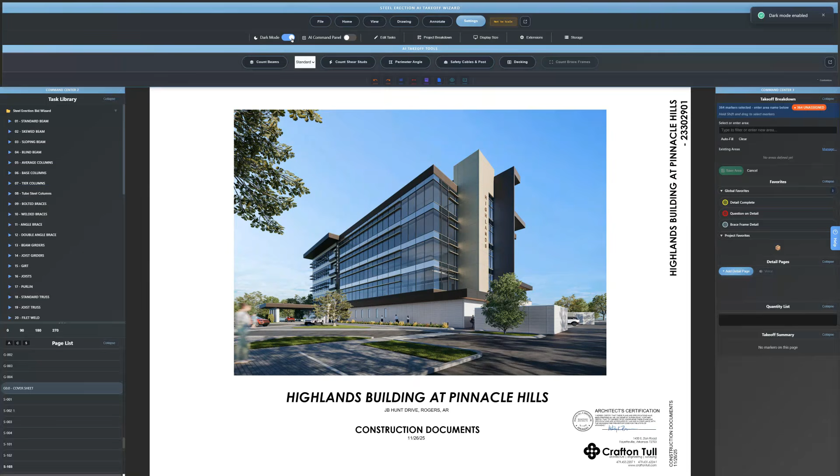So we're sitting here looking at it right now, the Steel Erection AI Takeoff Wizard. It's going to look like your typical takeoff software. A couple cool things in here: we have the ability to have light mode or dark mode. Myself, I'm more partial to the light mode, but that does give you an option on the modes.

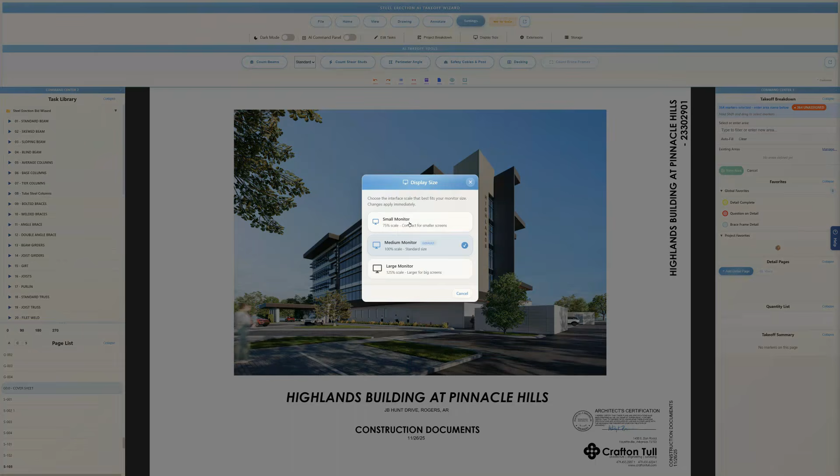I come over to display size. We have the ability, if we're on a smaller monitor, to scale it down to 75%. Everything changes. Make it large, real big if you have a hard time seeing like me. And then we come down to medium, and that's pretty much where I run it at.

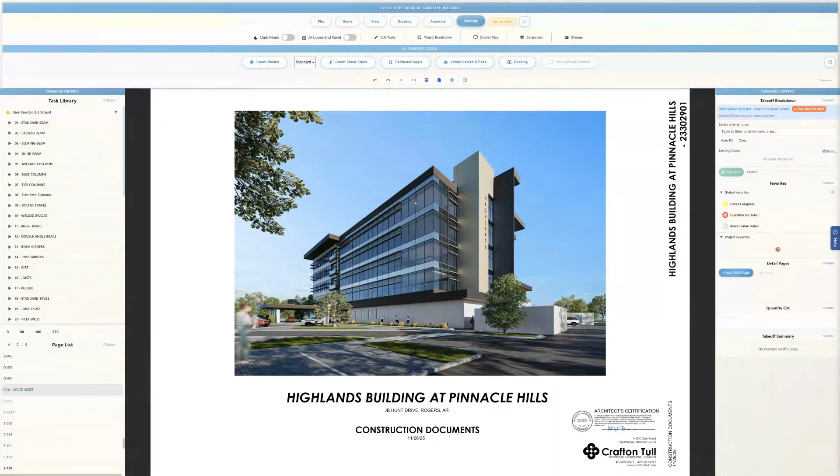Now to start this off, we're going to open up document control. Document control is where we're going to bring in our plans. Basically we've got to import the folder where the plans are at. Let me do that real quick. To start with, we're just going to select the plan folder itself. When we do that, it's going to pull the plans in, and once the plans come in, they're there.

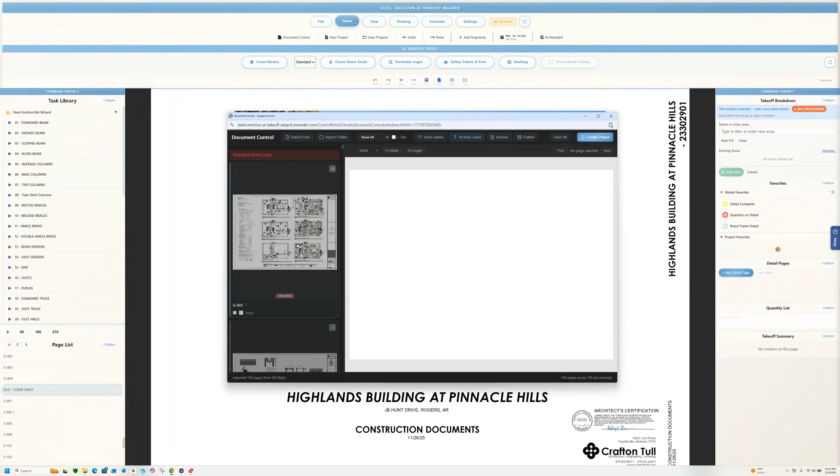At this point, the next thing we're going to do is flatten the drawings. As you know, a lot of PDFs have multiple markups on them, so when they come in they could have 15 layers on the drawing. That will slow down the processing of the PDF - when you change a page, it makes it change slow. So we flatten the drawings.

In the past, I've always used Takeoff - sold that to many of my clients, great software, amazing software in fact. But the challenge with that is I would have to use Bluebeam to label drawings because plans would come in not labeled, not flattened. So I'd have to use Bluebeam, which is a great software as well, to go in and flatten and label all my drawings. And then I'd also have to slot in addendums, and you guys all know that process and what a pain it is.

So what I've built here with document control inside of the Steel Erection AI Takeoff Wizard is the ability to bring in our plans, flatten them, and then have the system auto-label them for me. Once I do that, I'm going to bring in addendum 1 - it's going to replace all the drawings. Addendum 2, addendum 3, so on and so forth, until we have all the addendums replaced in the bid set. Then the system is going to create the bid set, and I'll hit a button and it will send it into the Steel Erection AI Takeoff Wizard.

So now we've got our sheets all loaded. We can scroll through here real quick, we can see them - I'm not going to take a lot of time here. The next thing I'm going to do now is auto label the drawings. It's already done - the classification is already complete, so they're already labeled.

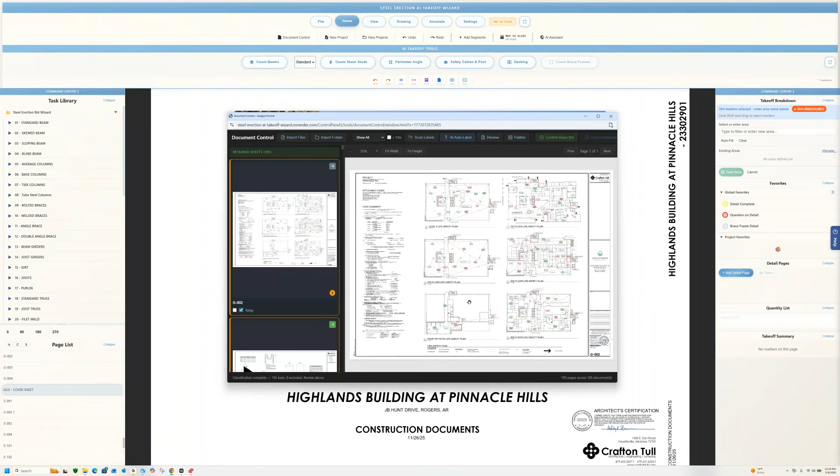And then I'll come over here - I've got to confirm my base set. So I had to run through there and make sure everything's right. Once I confirm it, as soon as I hit confirm, it'll say okay, and then it opens up a button where I import addendum. So I'm going to come in to the same folder.

Go into the project, grab the addendum folder, and select it. It's going to go through here and analyze the addendum folder for me, and come back with all the plans and a cover sheet of what happened within that addendum.

Now, once it's shown the change, it's going to go in and find all the plans, label them, flatten them, and then insert them into the bid set and supersede the base bid plans with the new addendum 1 drawings. The AI goes through and confirms all the changes in addendum 1.

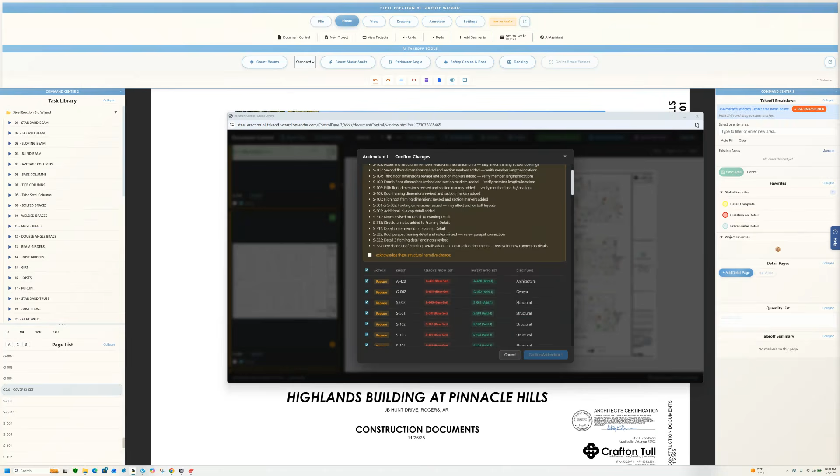You'll see here it replaced A420. The base set got removed. We ended with A420 addendum 1. We see architectural, general, structural, all those plans got changed. And then there's some new drawings that came in that weren't in the base set that got put in.

I've already told the system to delete all plumbing, electrical, and mechanical and all that stuff, so it's just automatically going to exclude those because we don't need to see them.

And then I have to acknowledge these structural changes and confirm addendum 1. Now that dumps that into the base set. If I come over here and scroll down a little bit, these all say base set, base set.

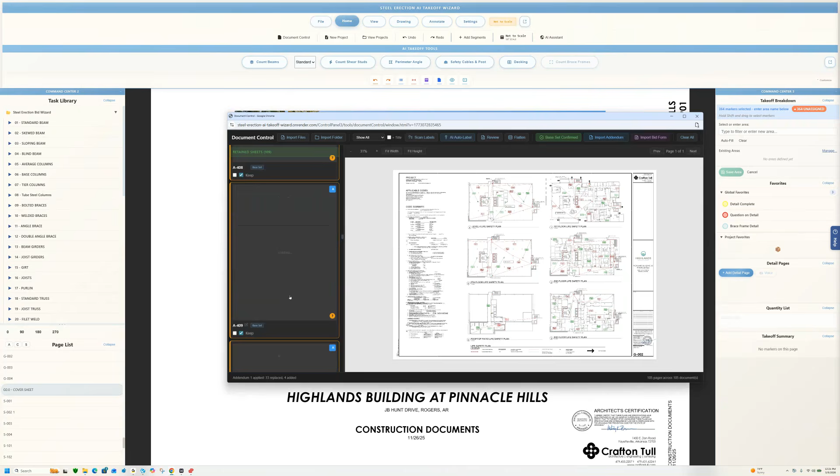I might have to go down a ways to find some addendum 1s that changed. But now we'll start seeing the addendum 1s come in. So now it'll flag that in the little view here, that those are addendum 1s.

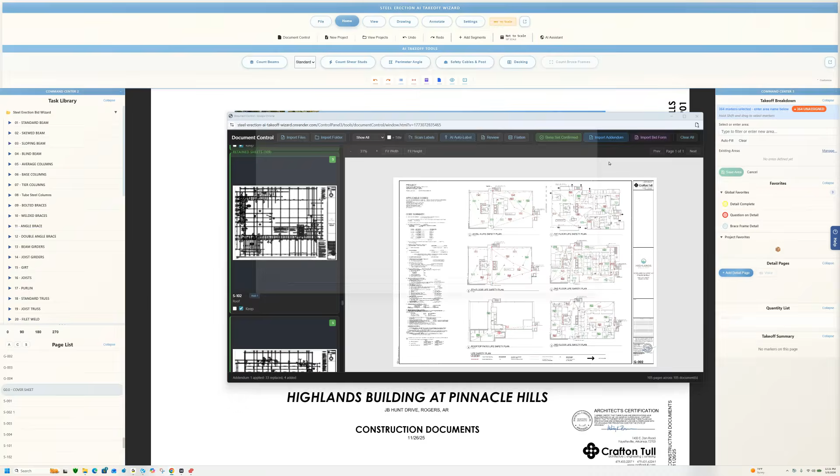So now we got to go to addendum 2. It's a process. I've got to go to each addendum and import it in.

And as you guys know, this is a pain in the butt process. It takes a long time.

What's nice about this is in the morning we can get our job startup going, start the process of checking the addendums. We can start doing other things, check emails while it's checking the addendums and building our plan set, and take care of other things instead of wasting our time going through folders upon folders and files upon files that don't even pertain to us as a steel erector, but yet we have to go through all the content to verify we don't need to see it.

Now we're going to take the heavy lifting off, give it to the AI, let it do all that stuff while we answer emails or do whatever activities we need to do through our course of business.

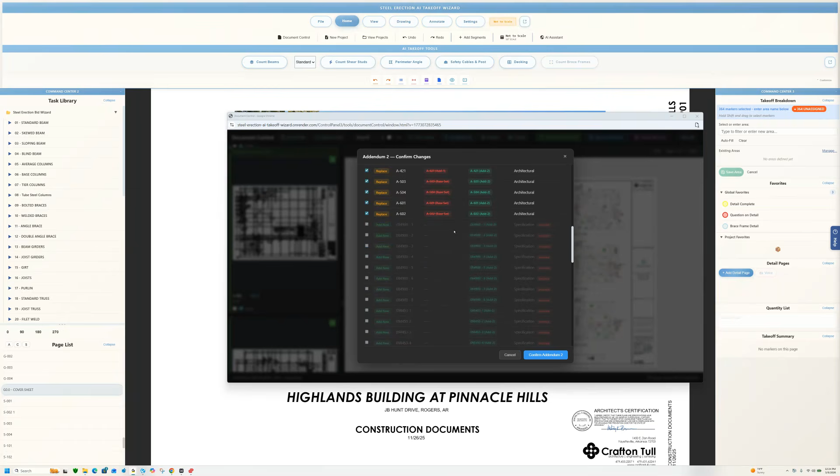Now we see the confirmed changes for addendum 2. Once again, you'll see replace and so on and so forth. Come on down, you'll see all these things that don't get added, specifications, because they didn't really pertain to us. So I'm going to confirm addendum 2. And now that's inserted into the set.

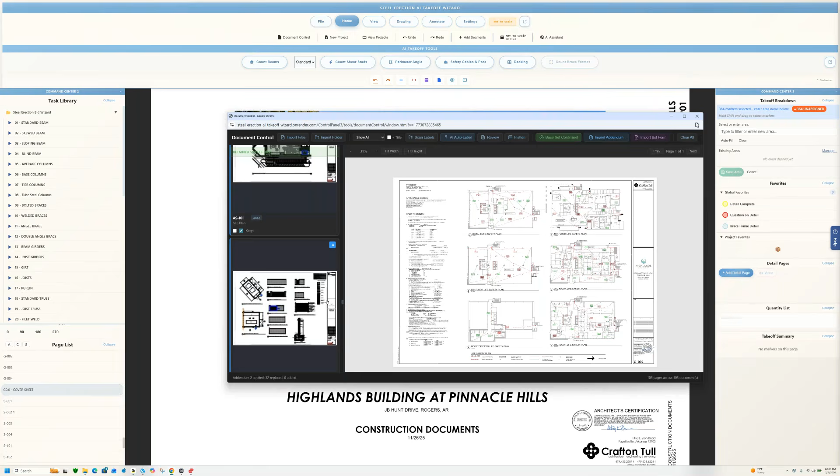Move on to addendum 3. And I know you guys know what I mean about the painful process of going through these plans when we get a huge drawing folder with a ton of plans that are just no rhyme or reason. They're just dumped in a folder and given to us.

So addendum 3 comes in. It contains exclusive MEP and electrical revisions. It has nothing to do with it, so process the addendum. Going to classify the pages.

And then we can move on to addendum 4. So confirm 3, import addendum, finally get to the last addendum in this project. I guess I shouldn't have picked a project that had so many addendums, but I really want you guys to see the pain point because I know you feel it.

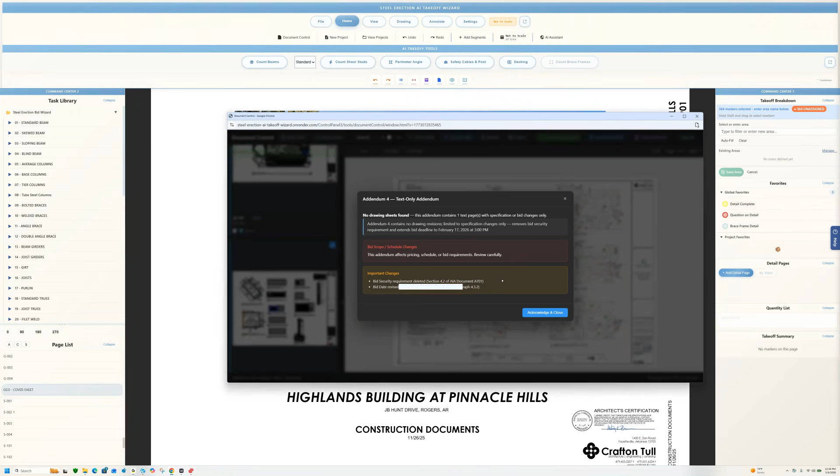Addendum 4 only had text pages, no plans. Bid security requirement, deleted. Bid date revision, change the bid date. Acknowledge and close.

And now I'm going to do one more time. At this point, we're done. We're ready to send it into the Steel Erection Bid Wizard, or the Steel Erection AI Takeoff Wizard, I should say. So now we're done. We got our bid set all built in with all the addendums added and updated.

And then there's addendum 2, addendum 2. I'm sure we keep going. We'll find addendum 3. Oh, no, addendum 4 imported had no drawing. So that's it. So now we've got a complete bid set. This bid set is ready to go into the Steel Erection AI Takeoff Wizard.

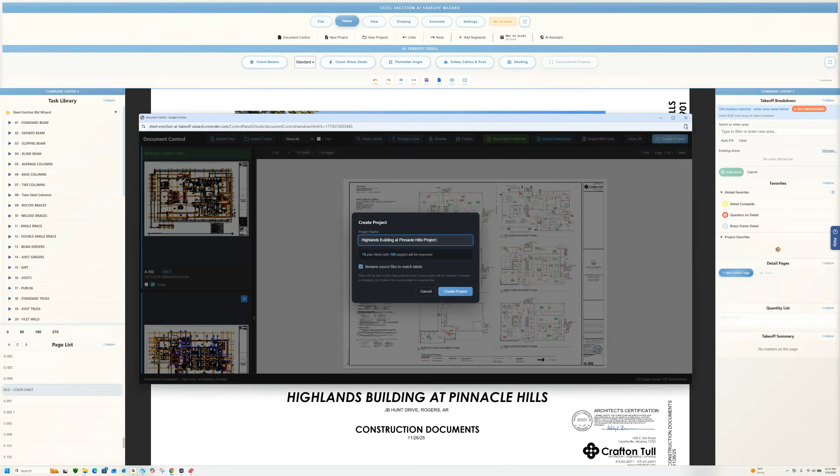All we do is hit create project. I'll have to name it. Just paste it in there. Create project.

Save it to the file that will save the takeoff that we do into the job folder. And now if we look, the Steel Erection AI Takeoff Wizard is now loading up with the project that we just created.

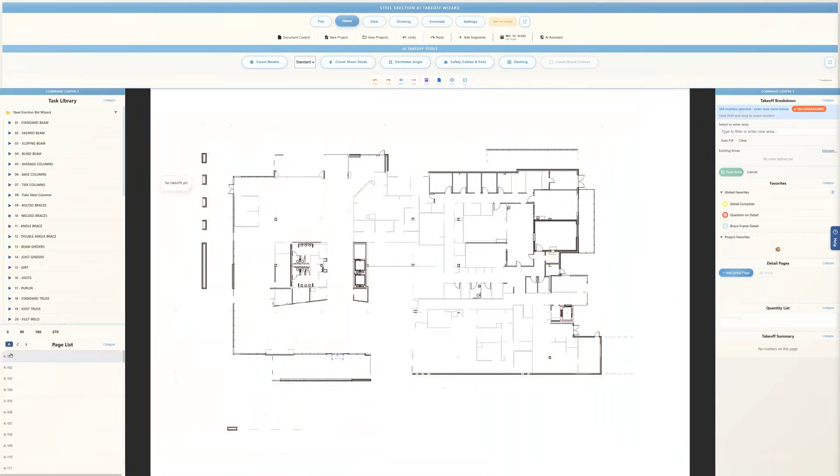Let me show you a couple cool things here. We got these buttons: A will take me directly to the architecturals, C will take me to the civils, and S will take me to the structurals.

Now I'm just going to talk about the setup process. It's just like your typical takeoff software. We're going to do a takeoff because the system counts all beams and shear studs on automation, taking that off our plate, which is amazing, and it does that in seconds. But we still have to do a takeoff, still have to go through all the details and look at everything.

So we got to set up this plan, and the setup is very simple. We come through real quick, set scale at 1/8 inch equals a foot, verify scale. So I come and take a dimension, and you'll see that mark in green, confirming the scale is correct. Second thing I do is set the search area, because I don't want the AI to count beams in notes. So I set the search area, go to the next page, set scale.

Now I'm going to go through this whole thing so you guys can see how quick it actually is to set up the process for doing a takeoff. Set search area, next page, set scale. We have to verify the scale on every page just because we set the scale doesn't mean it's right. But we run through here relatively quick, setting scale and search area.

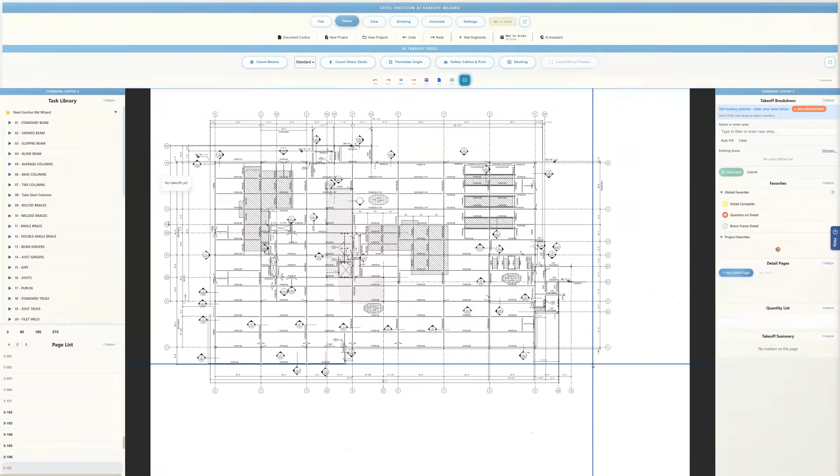I didn't set the search area, I don't think. I better do that. It is important to set the search area because you could have beams and notes. I'll set search area right away, then set scale and verify scale.

I guess I could have picked a smaller job to do a demo on, but we might as well get the full gist of what this software can do.

So now we've got our brace frames. These are all detail pages. Of course, I would count these brace frames as I set the details, but here's the power of setting the details in the Steel Erection AI Takeoff Wizard. Those people that have been using takeoff software know the challenge and the time it takes to set up detail pages.

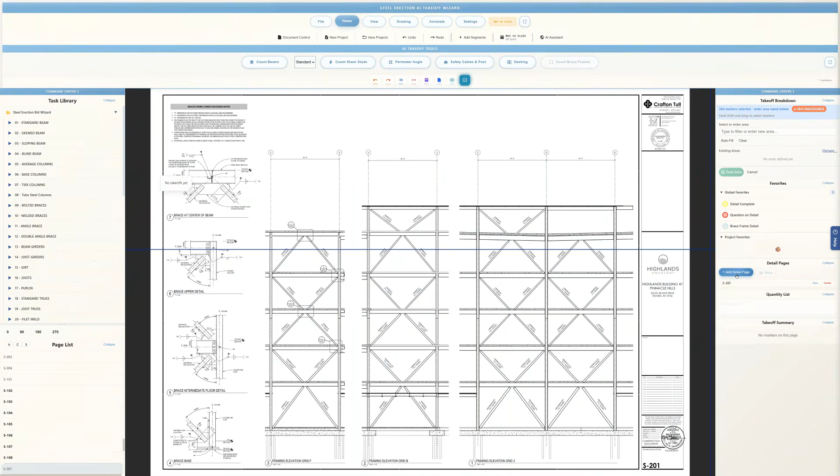That's where this is going to really shine as well. All I have to do is go to my first detail page, come over to add detail pages, and click it. It automatically adds it in. Go to the next page, hit add detail page, next page, add detail page - just keep going through all the detail pages, adding them in, which we can do super quick just by clicking to the plans and adding them to the details.

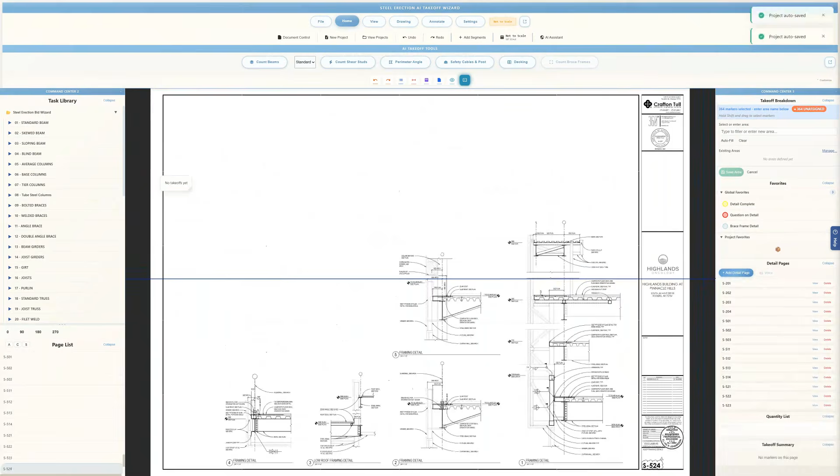We absolutely don't need that. So that takes us to the end of the project - all the detail pages are in there. And if we come back to our first page, we see the letters are bolded. That's also where we got the pages set up at, so we know just to come right back there and do our takeoff.

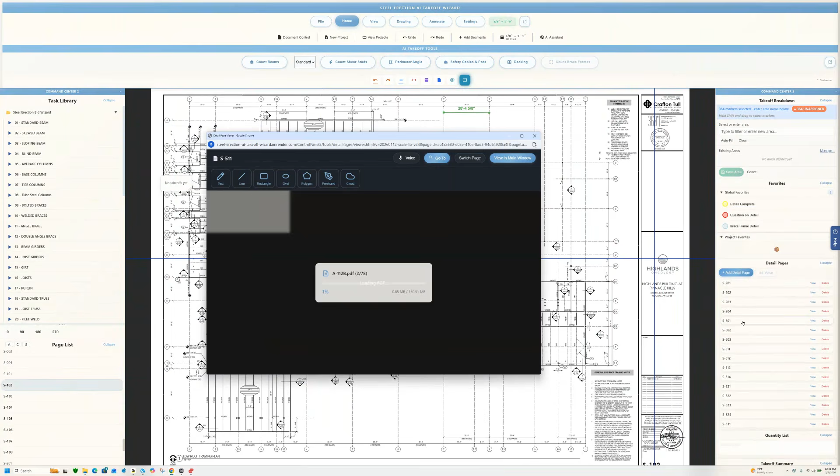Just to talk about the detail pages feature - if I click on it, open a new view window, this brings in all the plans that we set up for detail pages. Let me build that real quick, then I'll full zoom this. This one will actually go on your other computer, on your other monitor.

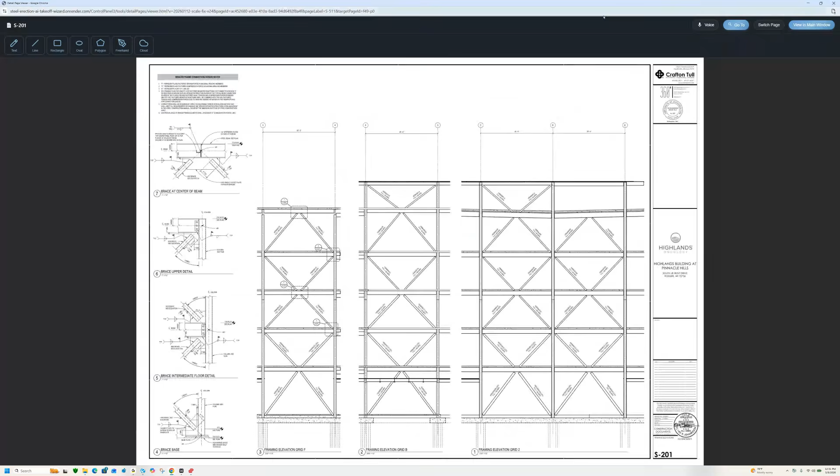And then we have the ability - when I've got to go to detail on S513, I hit the switch page and I'm immediately at that detail page. So now what I'm doing is looking left to right to do my takeoff of my details. Makes that process very simple, very smooth. I get to look at that detail on my other monitor while I'm doing the takeoff. Makes it very easy.

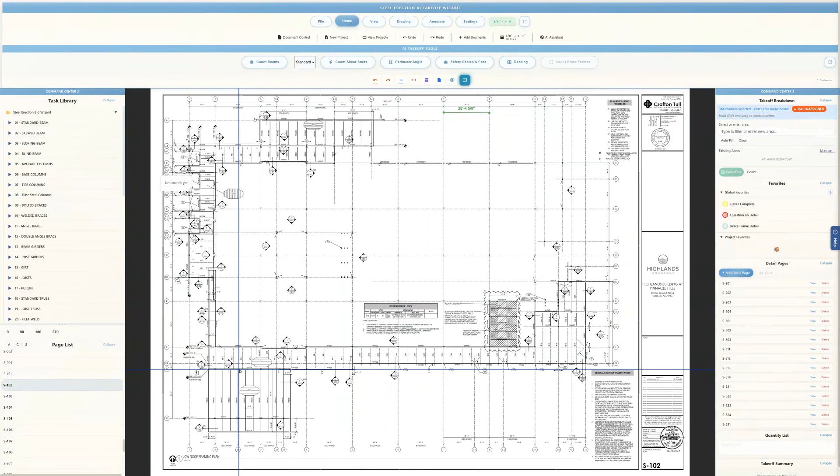So now we're set up ready to do the takeoff. We come here, we got beams, columns, we got some joists. So just to show this, I come up to my AI buttons: count beams, count shear studs. This floor doesn't have any shear studs, but I'll go ahead and hit count beams, and you'll see all the beams already got counted in seconds. They got put into the Bid Wizard categories - 12 to 14, 6 to 10, 24, 27, 16, 21 - already all in location to do it.

And I'm going to go to the next page just to, well, let me show you how we count joists so you can see that.

These are little 10-foot joists here. The joist spacing, let's see, I'll just say it's 5 foot. You want to be accurate on this because the way we have this set up for joists is important, because it comes off of spacing. So these are 10-foot joists. I'm going to come to my joist, get my 10-foot joist, come over to the right-hand side, say on centers, and tell the system those joists are 5 foot on centers. That is the default spacing.

All I have to do is click here to there, there to the next beam, there to the next beam, and this is counting 5 foot on centers.

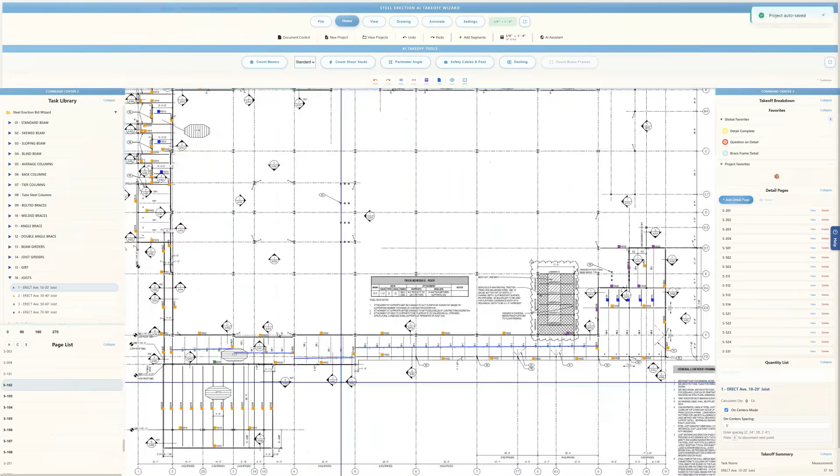And the spacing's off a little bit. I need to probably measure it, but if you look real close you'll see little dots, little triangles. That's showing the spacing of the joist, so it gives you a visual that, hey, this joist spacing is off. So you've got to make sure you measure the joist spacing before you just put 5 foot. If it's 5'2", you've got to put 5'2". If it's 6'4", you've got to put 6'4", so the spacing will be correct.

But it just makes it very quick to be able to take off joists. It's just a matter of telling it what the spacing is, click starting point, click end point, and it's going to count them joists for you.

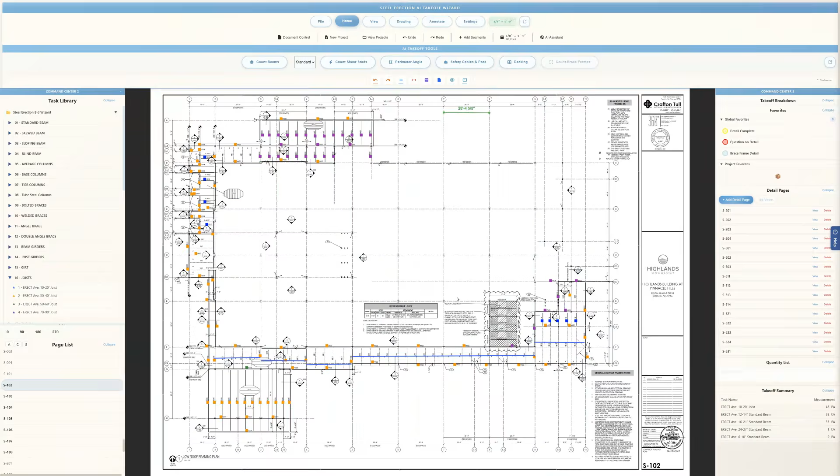I'm going to jump to the next page, and I'll do a little quick takeoff on the angle as well, just to show you this process.

But let's count the beams. Just counted them all, put the little legend up. We just counted quite a few beams. Hit count shear studs, it just counted the shear studs. Let's see, 1,964 of them.

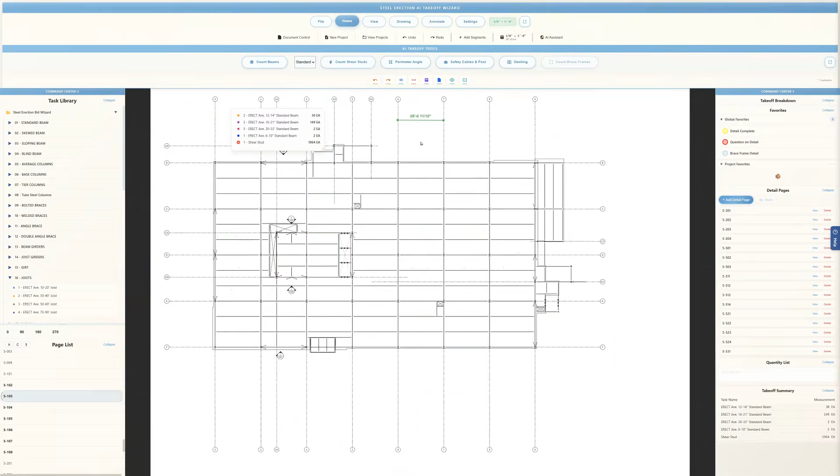Now we're going to come to the next page, we do the same thing: count beams, count shear studs. Now you see all the shear studs are counted, 2012. Go to the next page, count beams, count shear studs. Next page, count beams, count shear studs. Next page, count beam, count shear studs.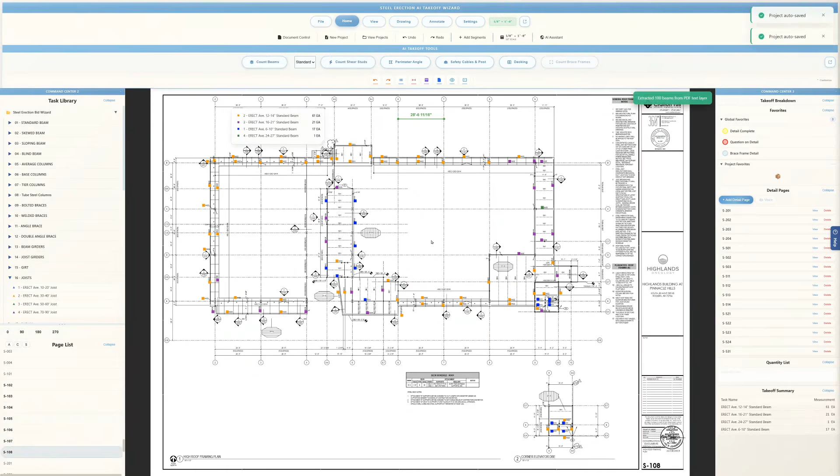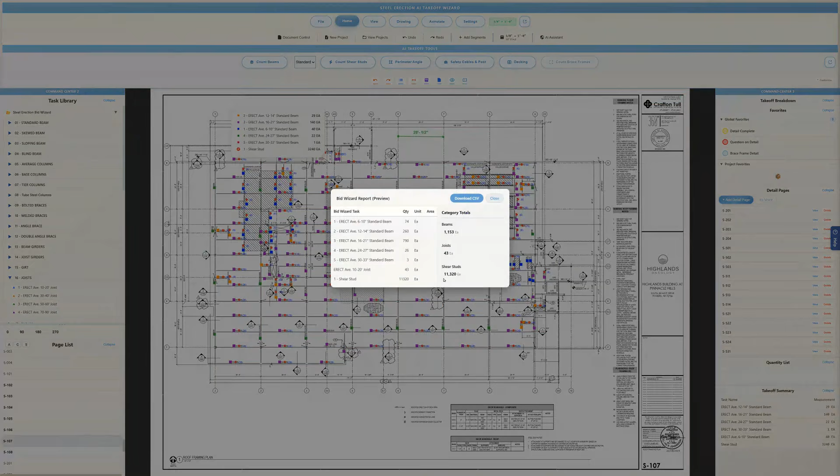Count beams. And of course there's no shear studs on that roof, so it's not going to count any shear studs. But we basically just took off, just so you see, if I come to the Bid Wizard report, we just counted 1,153 beams and 11,320 shear studs, and we did that basically in seconds.

Now let's just come back here. We'll talk a little bit about taking off the perimeter angle. Not a big deal, but I do want to show you the feature we have to speed this whole process up. There will be a time where we're going to have this perimeter angle, and we're going to be able to hit this AI button, and it's going to mark the perimeter angle. We're not quite there, but it's coming.

Same thing with safety cable and decking. But my goal is to get this out in your guys' hands, get you using it, because right now with what it does, it's going to speed everything up substantially. I'm not going to get too accurate on this because I'm not doing a takeoff, I'm just kind of showing you a demo here.

Well... kind of mess that all up, but we're good. You'll get the idea.

Then, as you guys know, we have safety cable and angle going around the floor shafts. So myself, when I've got angle going all the way around, I will take all the angle off like this around all these shafts. The reason I do that is because it's going to make it simple to get my safety cable done as well.

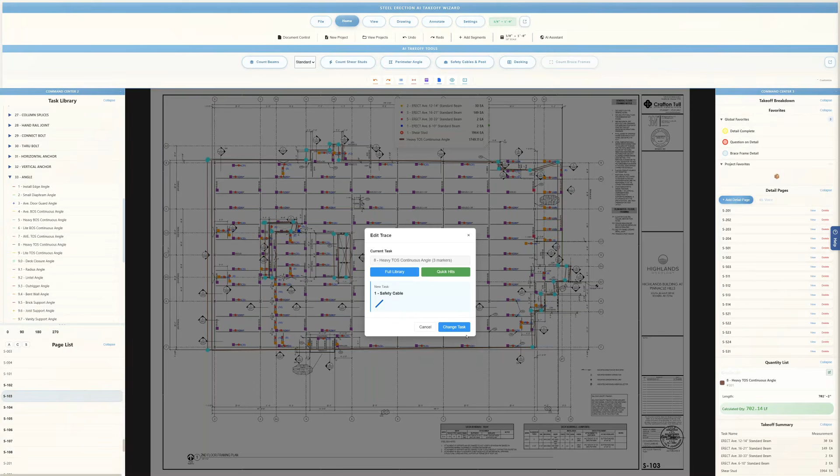So now we've got that angle done. What I'll do is simply copy that and paste it, drag it down into place, right click, edit the trace, and then there's a button called quick hits. We change that to safety cable, change task. And just so you know, when you've got safety cable selected, you come down here, it's going to tell you how many turnbuckles you need and how many cable clamps you need to install that cable on the floor, which is a really good thing to know.

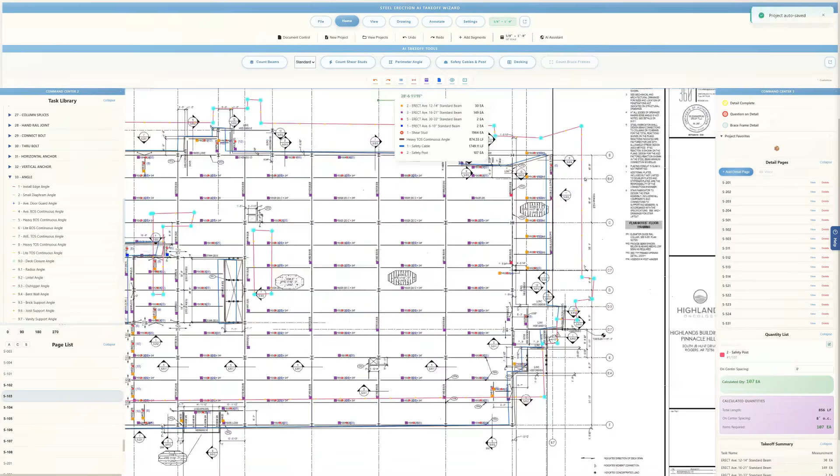Then I paste it one more time, that angle, right click, edit trace, quick hits, change to safety post, change task. Now that's changed the safety post. And if I click on this, you will see we just got 587 safety posts, 8 foot on centers, which is what OSHA says we've got to put them. And you also notice here, again, that little yellow dot, that's specifying that's every 8 foot. That way it's just a visual that, hey, yeah, this is taking this off on centers.

Now that we did that, I can just paste it one more time, pull that angle over here. Right click, edit trace. Go to the full library, come down to decking. It's 3-inch deck, change task.

Now I just took off the deck, so off that one takeoff angle I changed this. Off that one takeoff of angle, I got my safety cable, my safety post, and my deck in very, very quick fashion.

When I'm done with the takeoff, hold the shift key, rope it around. I come up here to my takeoff breakdown, and if I hit autofill, it's going to pull in S103, second floor, and label it for me. I don't have to do that anymore. Go to the next page and watch this.

Let me just show you this too, just for the heck of it. Hold the control key down, let me get all these out a little bit. Let me just show you something cool here. Let me get this out of the way.

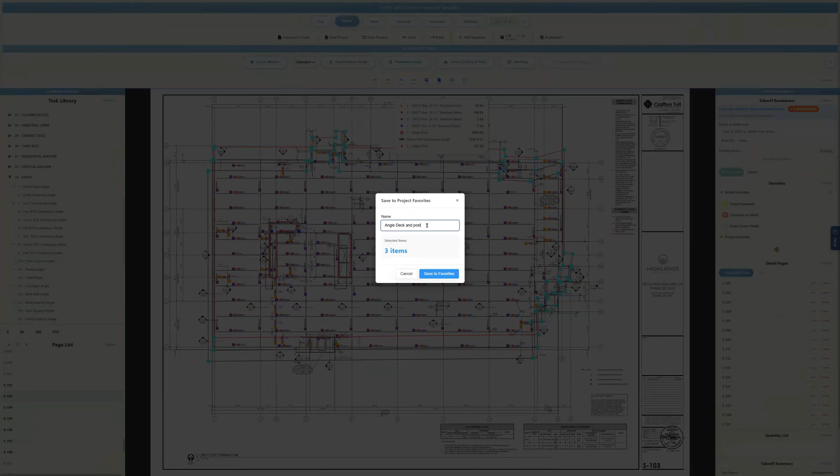So now what I can do is control, get all these. I could right click, add these to my project favorites, just for example, save to favorites. And if the building was typical, I just sit there and do that, then drag these right out onto the floor. And now that angle's taken off on that floor too.

Just a way to simplify that whole process of getting your takeoff done. Then when we're done, we come to the Bid Wizard report. There's all the information—of course I didn't finish the bid, but there's all the information. Bid Wizard task.

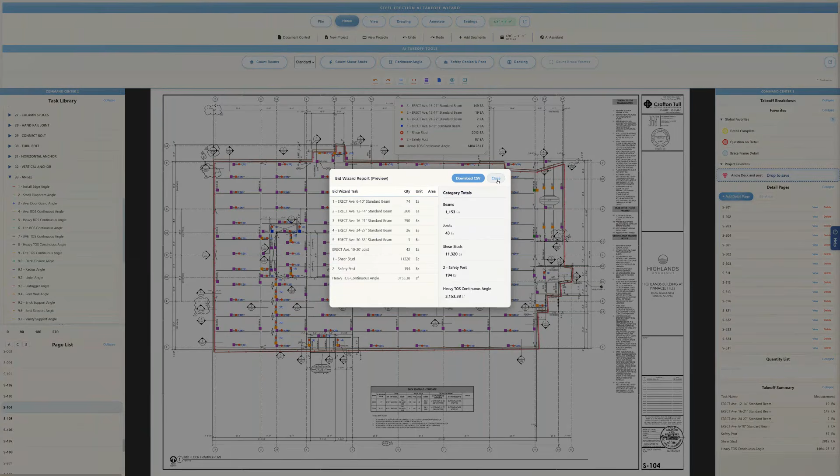And we import that into the Steel Erection Bid Wizard, and then we got our erection price. I think you are going to be able to see the power of what the Steel Erection AI Takeoff Wizard can do for your takeoffs, how it can speed you up.

Let the AI in the system handle the mundane things that take our time, that have to be done. But now we let the system do those things where we can spend our time where it matters, in the details, because we all know that's where the money's lost at—in the details.

It's not counting beams—if we missed a few beams or some shear studs in a takeoff, we don't lose any money. Oh, we could lose money, but it's not drastic. It's not what kills us. What kills us is the details. That's where we lose our money.

And so now we can spend time in the details, let the AI take care of the mundane things that are very important, but let the AI do it and let us as a human overview it.

As you can see here, if the beam's not counted, it's not colored, so it's very easy to see. For example, if I remove this one right here, it's very easy to see when I'm going through the details and I zoom in—oh, that was not counted.

So now all I have to do is come over here, because it's AI, you might have some beams missing. In a takeoff, it has beams missing all the time, and I still have to go count them. So it's still not going to be 100%, but I will tell you it's probably 98%.

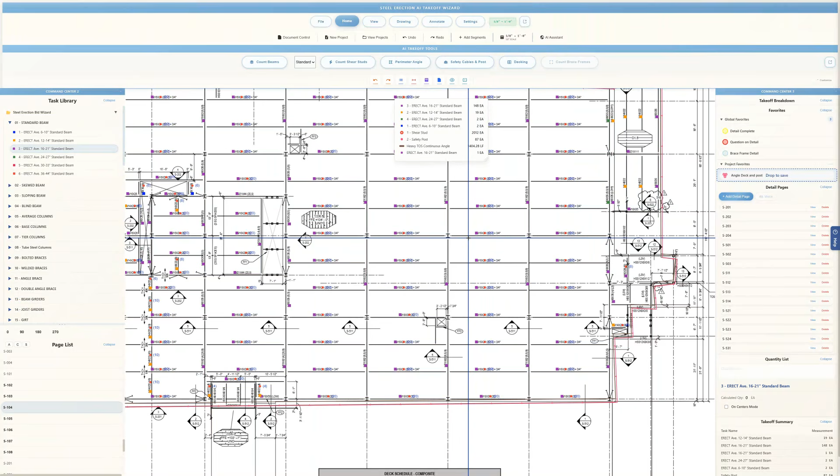You see right here, these 999s—it's not counting those shear studs. That is something we're still working on to get the system to calculate that out. But it's little things like that.

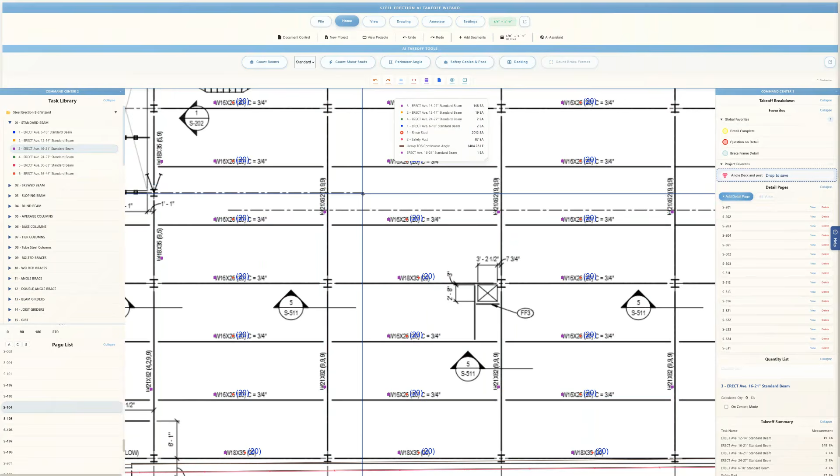This is getting ready to go into beta. I've got this thing dialed in, I believe, where it's going to be on the money before I get it in your hands—that has been my goal. That's why I haven't said nothing for a year. It is my goal to get this thing dialed in, so when it gets in your hands, you can 100% trust it. But it's coming.

I'm hoping to have it in your hands very, very quickly. But I hope you can see the power of what the Steel Erection AI Takeoff Wizard can do for you and your company. And I look forward to working with you guys throughout the coming years.